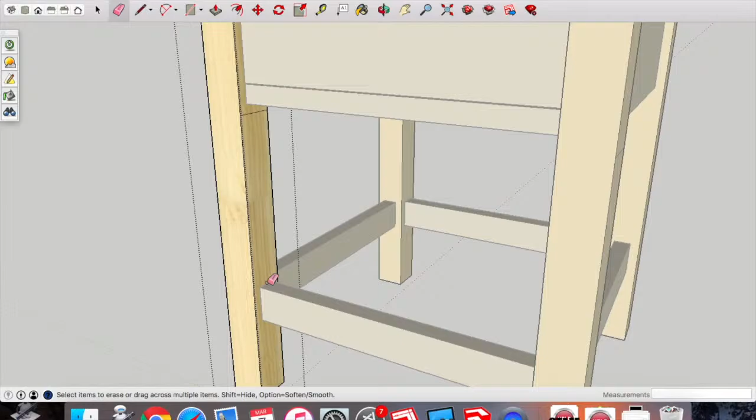With the pencil tool, come down 10 millimeters, and what we're going to do here is just draw a line horizontally across the leg there, 10 millimeters below the drawer bottom rail, and similarly we're going to draw a line that's 10 millimeters above the bottom rail. That's just to give us our 10 mil clearance for when we're turning the leg. We don't want to be turning any closer than that towards that bottom rail. That bottom rail needs to go in on a square piece of the leg.

So effectively here, we'll just double check with the tape measure tool. We should have 180 millimeters, which we do.

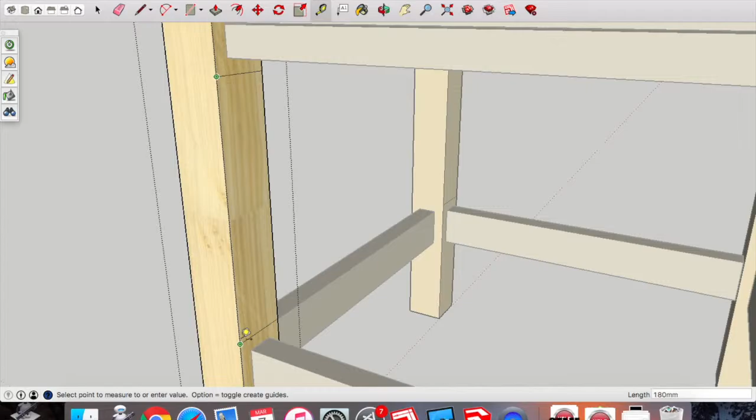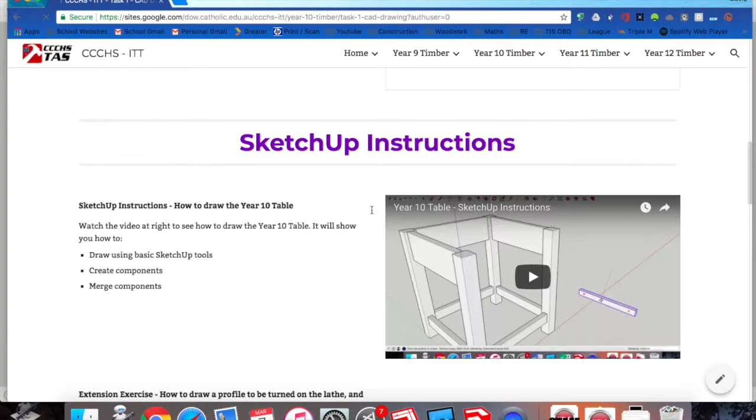Okay, once we've drawn that, I'm going to point you towards the Industrial Tech Timber website. Go there and go to the Year 10 Timber, Task 1 drop down, and navigate down to where you see this video. It's not there at the moment because I'm recording it now, but next to it you'll see a sign: click here to download the Square to Round.skp. That's a SketchUp file I've created. You just have to press download here.

This is basically a square to round profile, and that'll go to your downloads, to help you join your square leg to your round profile, your lathe profile.

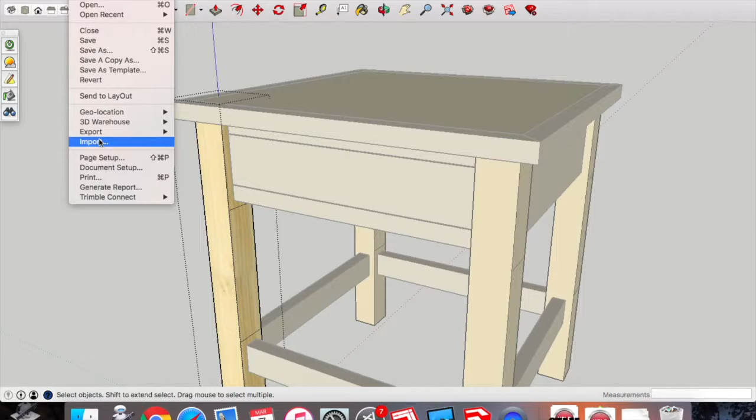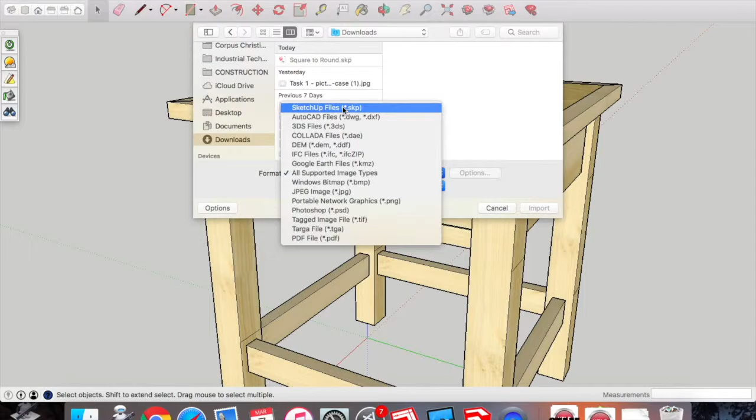Go to File, Import, and make sure you navigate to your downloads there, but you've got to make sure that in the format tick down here you've got SketchUp files, otherwise it won't come up. Select Square to Round, and it will import that little SketchUp file I've created for you.

And as you see here, basically it's got a square bottom and a round top. So it's just a little bit of a connector between your square leg and the round profile we're about to create.

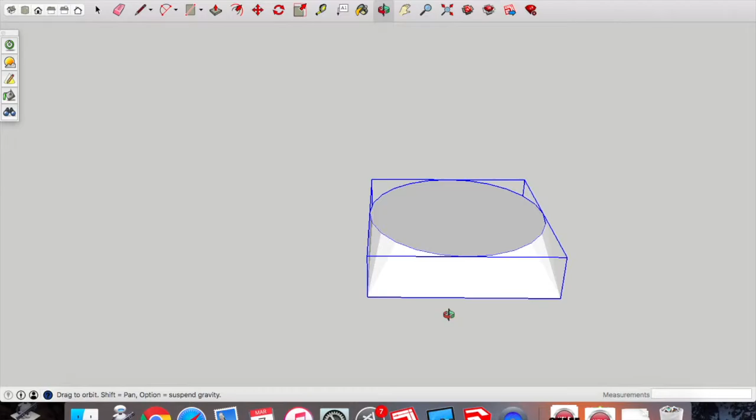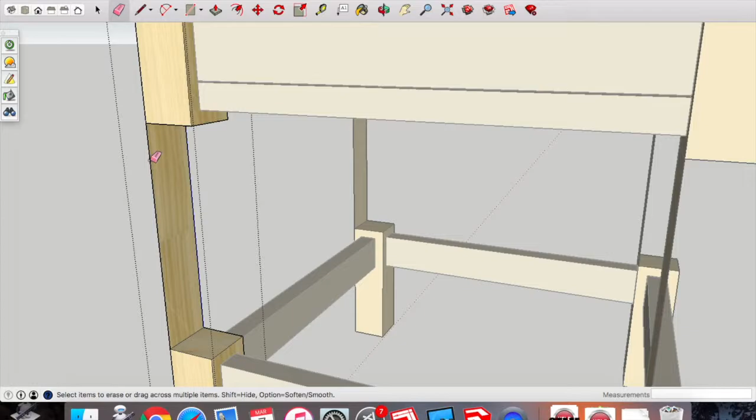Okay, a little something I forgot to do here. Just double click on your leg again here. We're just actually going to extrude that timber out. You'll notice when we get the push pull tool here, it does it for all four legs, which is another bonus of component editing, because those four legs are the same and we haven't made them unique.

They will all disappear. So that gives us room basically now to create our profile that we will make on the lathe.

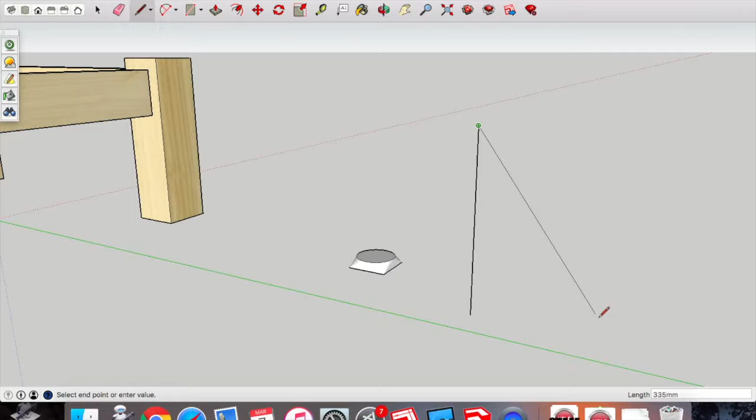We're going to pick the pencil tool here and we're going to draw on the vertical plane here 160 millimeters. It's really important that that's 160. Okay, and we're going to come across 20.

So those dimensions very important, 160 high and 20 millimeters across. We'll end up with a rectangle like this. That's going to be our area for a profile.

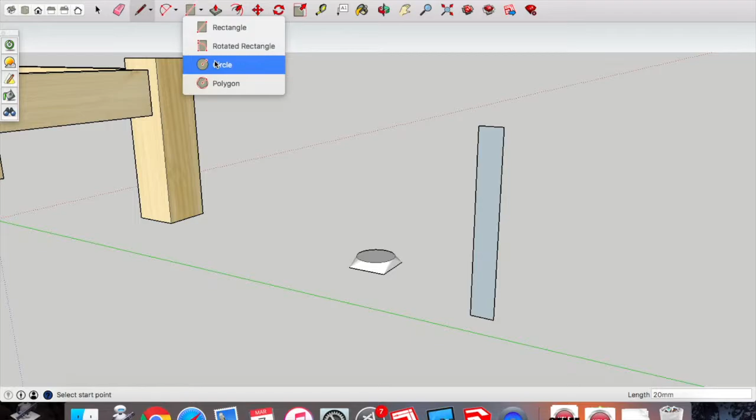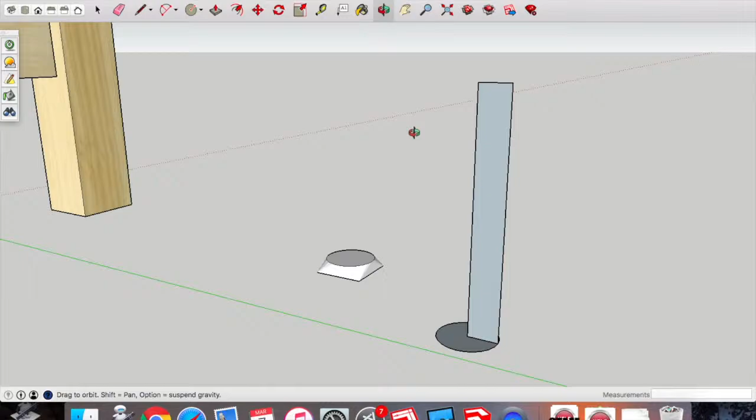Now we're going to pick up the circle tool. It's really important here that we draw a circle on the horizontal plane here. You can see I'm playing around here, that it'll go blue. So pick that circle up from the inside of the profile to the edge there, so it has a radius of 20 exactly. That's really important so that it matches up with our squared round profile that you've imported.

Okay, I'm just going to plot some points here that I'm going to use as a midpoint there for my profile. Now you will do this individually as per whatever profile you are choosing to do. This one I'm just picking the midpoints and then the midpoints of that main midpoint, so I can draw my profile with an arc. So the main midpoint and then my sub midpoints, I guess.

And you'll see in a sec when I get the arc tool, that will give me points to then draw that in.

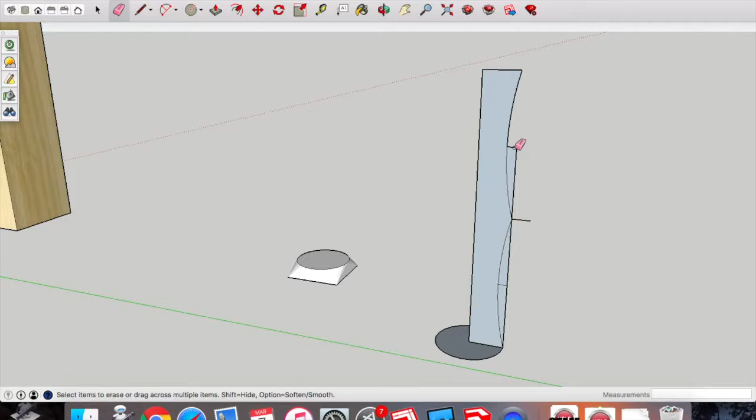I'll pick up that arc tool. I always use the 3-point arc tool. I find that's the easiest to use. So start and end point, and then you can use that second point there, or that midpoint, to then do the third point of the arc. That comes down to personal preference there, but basically whatever tools you need to draw your profile there, your edge profile of whatever you're wishing to do.

This is a nice and simple one. It doesn't need to be overly fancy or difficult.

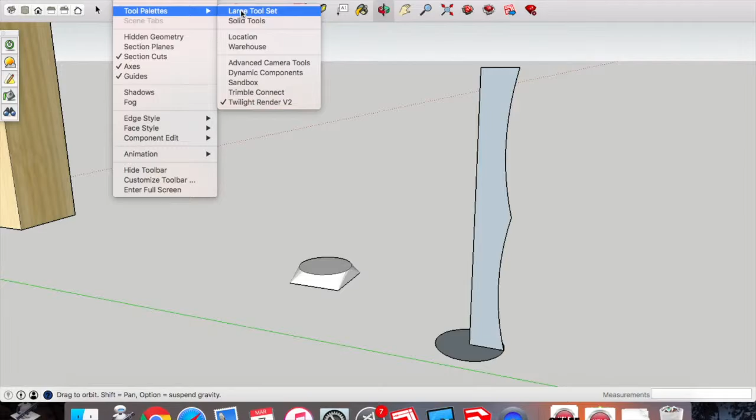Now it's important you go View, Tool Palettes, Large Tool Set. We need the Follow Me tool, so we're going to choose the Follow Me tool here.

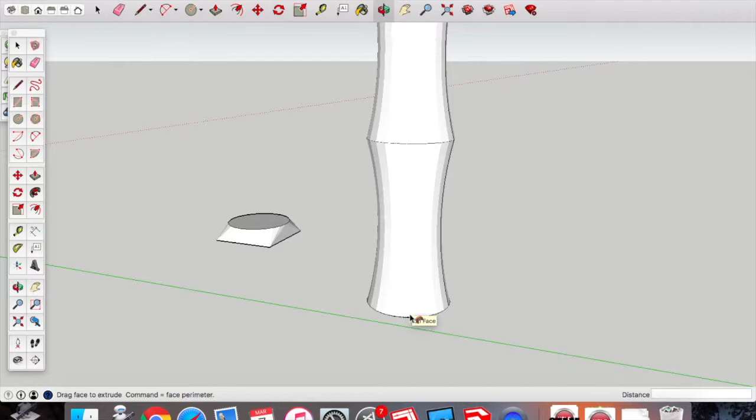This can be quite simple. Basically what we're going to do is select our profile there and hold down the Command key, then go to the circle at the bottom, and that will make the profile for us. It's really important that you select that profile, press the Command key down, and then select the circle at the bottom. That's an important step. Alright, and that's going to give us our leg here.

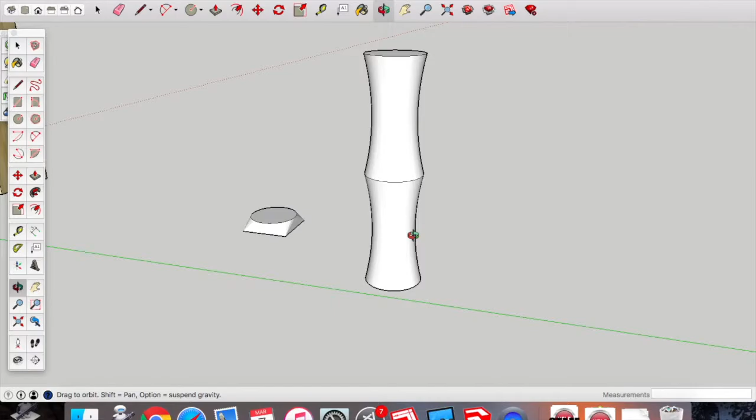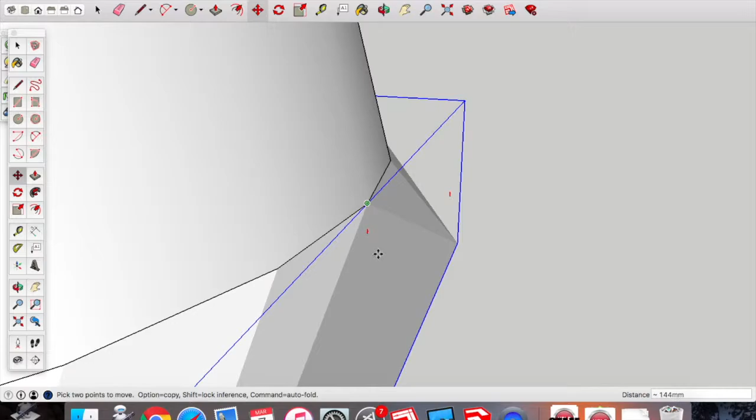Now we need to basically put that squared round profile on the bottom of our leg profile here. So I'm just going to select it and get the Move tool from that endpoint and drag it onto the base of our leg profile. That's why it's really important to have a 20mm radius circle before, otherwise they won't match up.

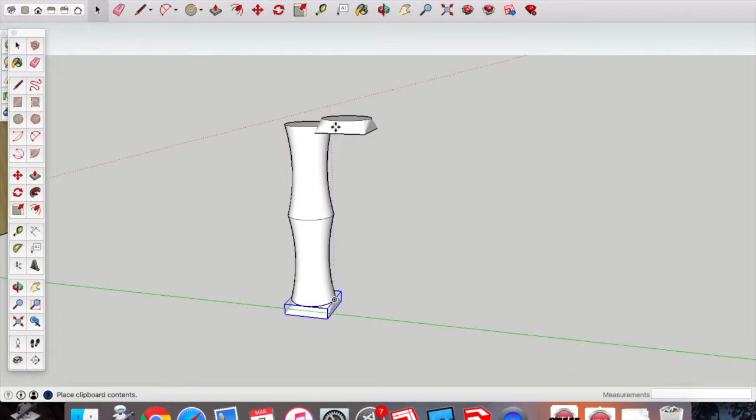Okay, now we're going to need to select that squared round profile at the bottom and copy and paste it because we need to put it up the top now. Obviously we're going to need to flip that 180 degrees, and then we can move it onto the top of our rounded lathe profile.

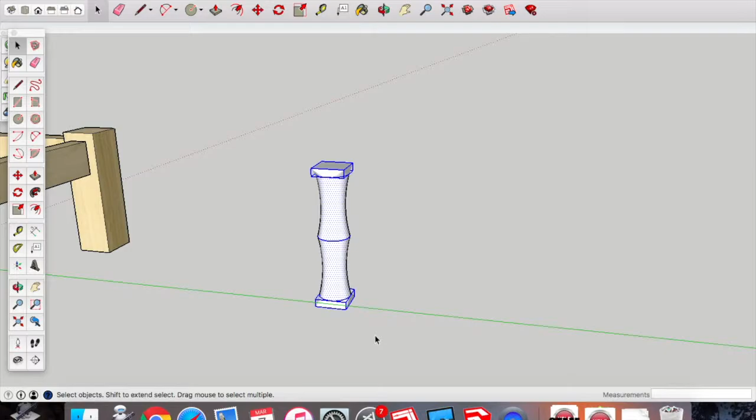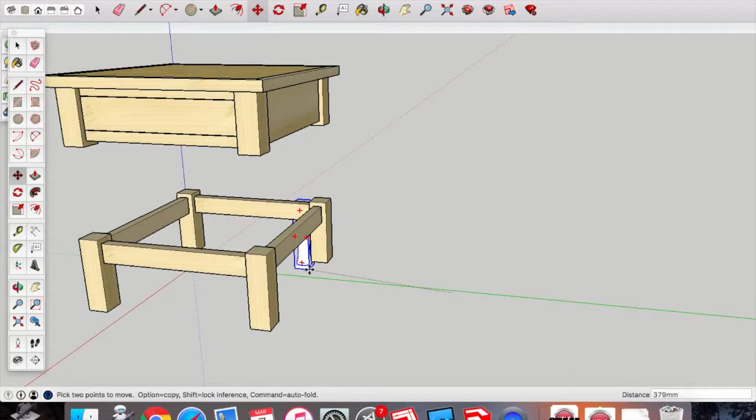Now we're going to select this whole, the 3 pieces, and select Make Group. That's so we can drag it up onto our leg. Select the Move tool, make sure you grab the end point so it easily can tack onto our leg here. Once you find that point, you can click and it will paste it in place.

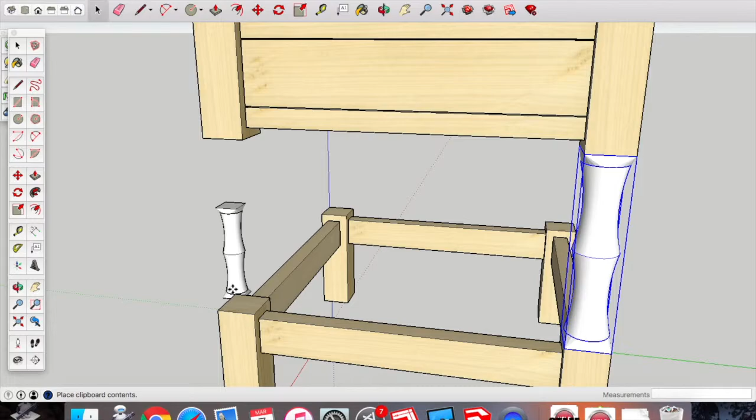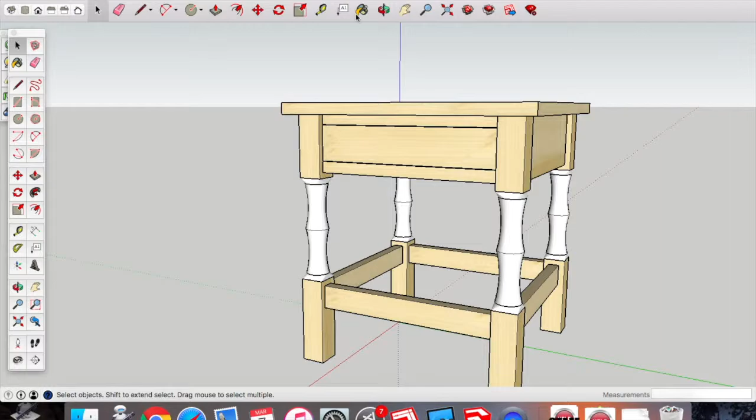Now we're going to make sure we copy the entire leg profile there and paste for the other 3 legs. You can pick up the paint bucket tool and then paint it with whatever timber texture you've chosen for the rest of the table. And that part's completed.

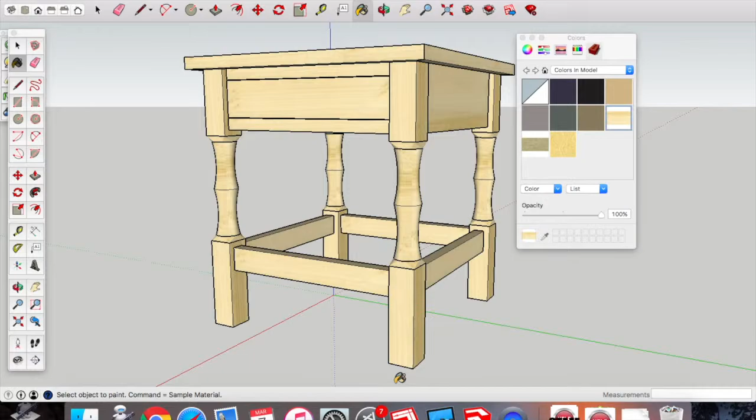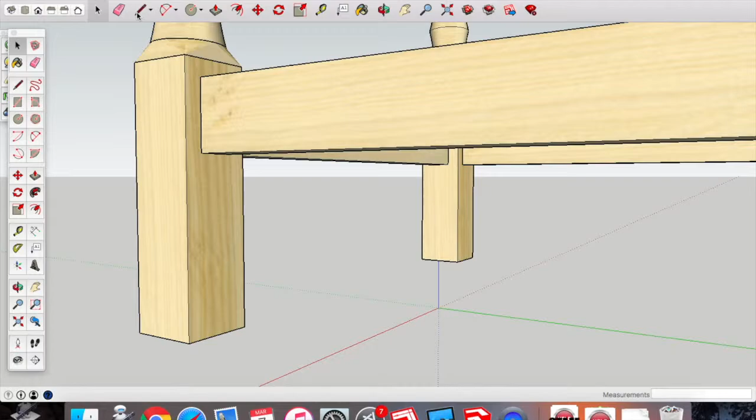Now we're going to move on to the base of the leg and put a bit of profile in, because it looks a bit chunky now that we've taken some of that timber out for the lathe part. I'm just going to do a simple angle here that goes both ways. Make sure you've got the leg selected, and again make sure you're editing that component, not just drawing on top of it.

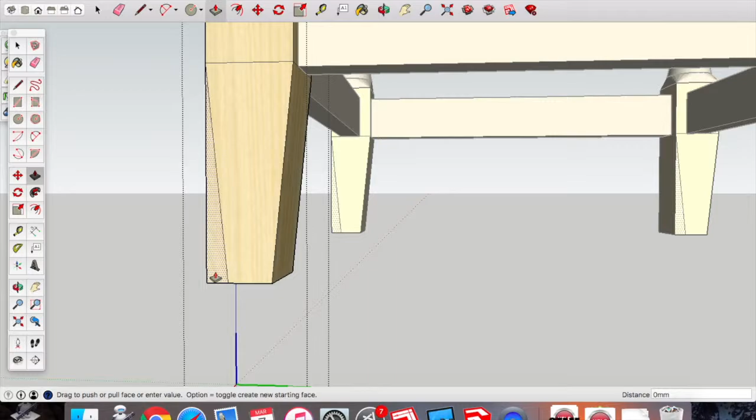I'm going to do this even with the bottom rail here, so I'm just going to draw a line across there to the edge from the bottom rail and then across the front face there. Alright, I'm going to draw in 10mm from each corner at the bottom here. Draw a line and just type in 10 and press enter. I'm going to connect that line of those dots, so 10 in from the bottom, connect that with the top point. I'm simply going to get the push-pull tool and push-pull that material away. You'll notice this is doing it on all four legs again.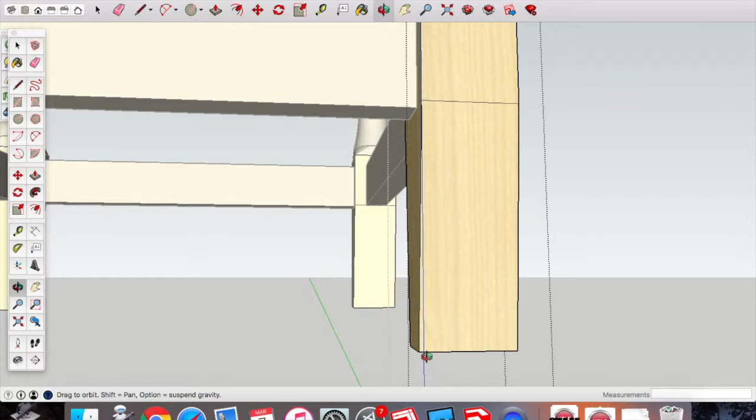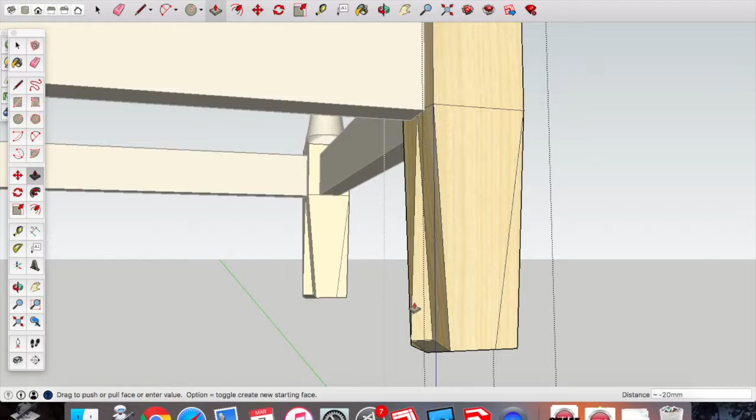We're going to do a similar thing here, so 10mm in from the other edge and join that line up to the top, and the same on the other side. This time I'm going to show you that we're going to try and extrude it with push-pull, and it's not going to quite work. Because we're on that angle already, it's going to basically extrude on an angle up and not take out all the material. End up with something awkward like that.

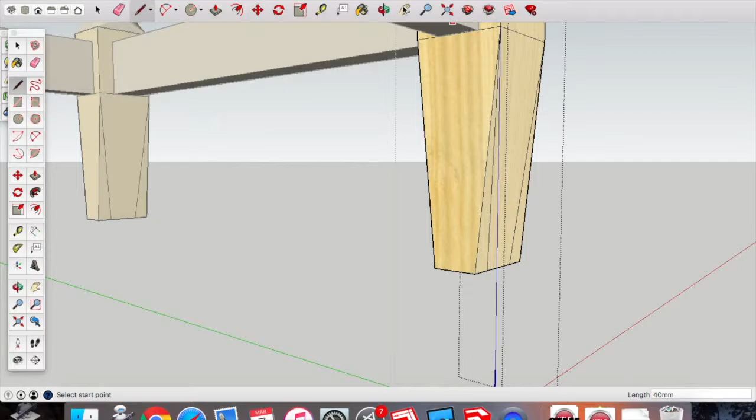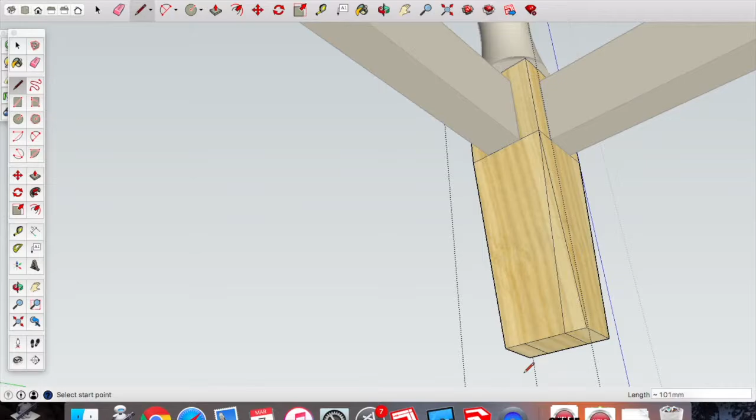The reason is because of that angle on the leg already. So what we effectively have to do here is draw in all our lines that we require, up the top here and on the base of the leg, basically all of our lines as if we were drawing it manually, and then delete the lines that we don't need. So I'm just going to draw in all those lines on the reverse side of the leg here, draw those angular lines in again from that face. Okay, so once I have all those lines in the whole way around that profile, I can then pick up the eraser tool and erase those outside lines that I don't need.

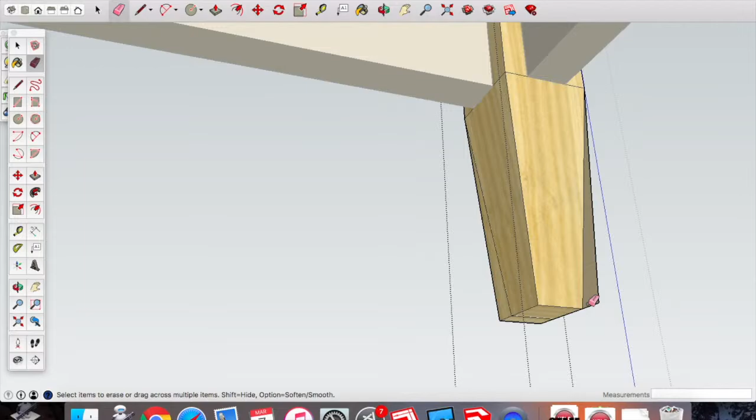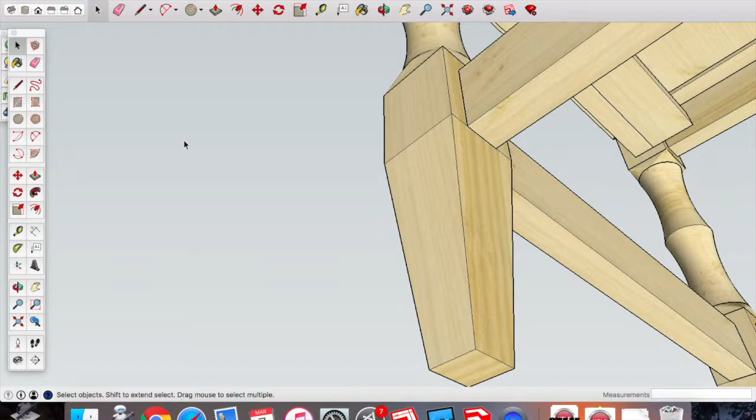This is a good trick for any time you need to draw at an awkward angle. Again, we only have to do it to one leg as it's component editing, and it's already happened on the other three. Okay, so just doing a simple little angle like that kind of makes the table a little bit more suitable as an overall piece.

Okay, and that's the end of the video for doing the lathe profile and the angle at the bottom of the leg.